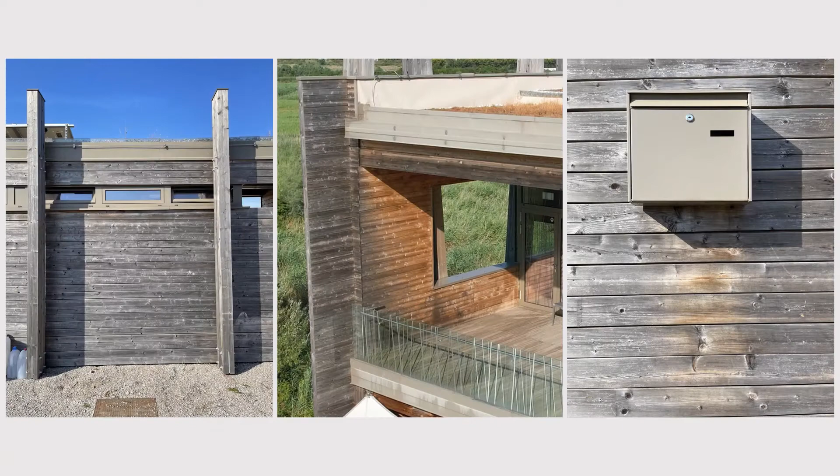This is usually accomplished by applying surface finishes that can function as a protective measure, aesthetical measure, or both. There is also the option of leaving the wood untreated to achieve a gray or silver effect. But in this case, the user should be aware that not only will the wood weather and dry faster, but it will do so more unevenly.

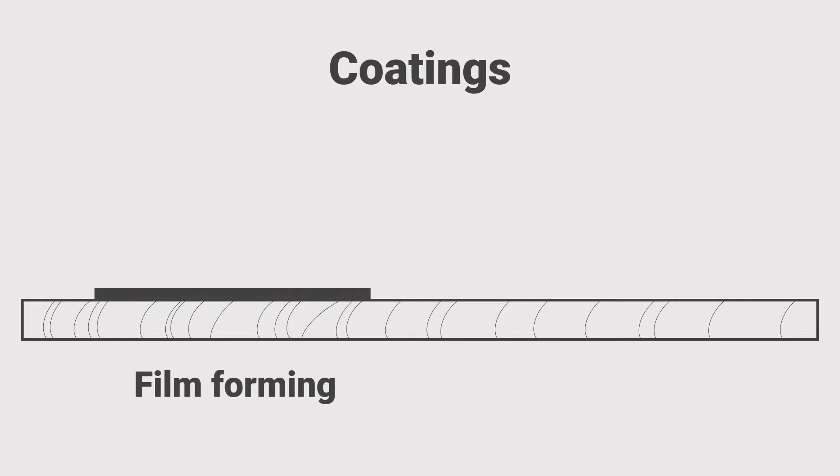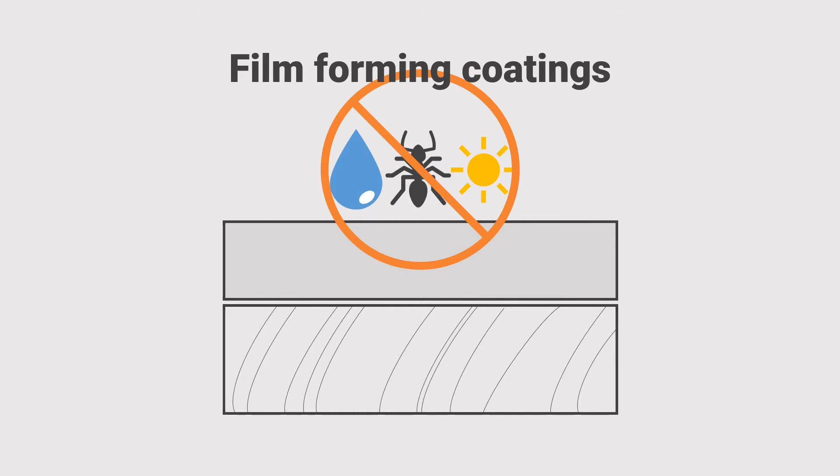Broadly speaking, there are two types of coatings: film-forming coatings and paints, and penetrating oils and stains. As the name suggests, film-forming coatings create a durable film on the wood surface that acts as a physical barrier to the elements and insects. These include clear and semi-transparent coatings like varnishes, and opaque coatings like paint.

Pigmented products offer better protection from ultraviolet radiation since they block sun rays before they reach the wood, making them more resistant to weathering. However, these products cover the wood's desirable aesthetic properties, such as grain and texture. In contrast, clear coatings bring the authentic wooden surface to life, but allow UV rays to penetrate and absorb into the wood.

While film-forming coatings are marketed as long-lasting, they do tend to crack and flake if not maintained regularly. Cracks and flakes in the coating or paint allow water to enter and become trapped between the wood and coating, creating a perfect environment for decay.

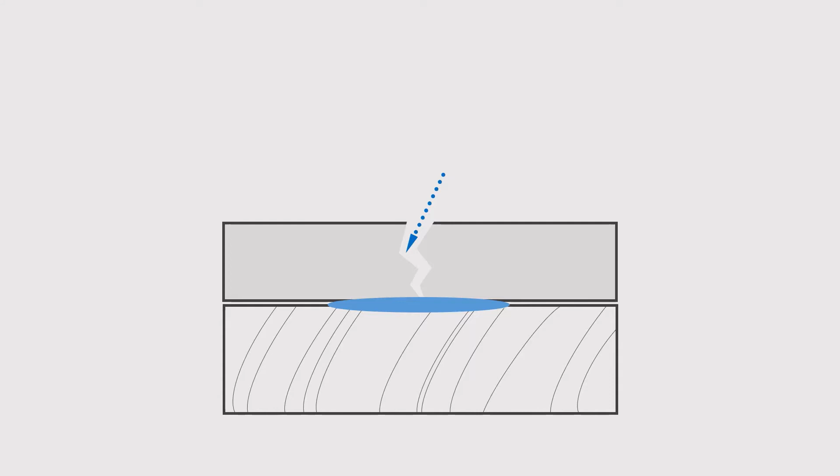Once cracks, peeling, and blisters start to appear, the coating needs to be removed completely from the wood before recoating, creating a lot of work for the owner. For this reason, film-forming coatings are not recommended for highly exposed areas.

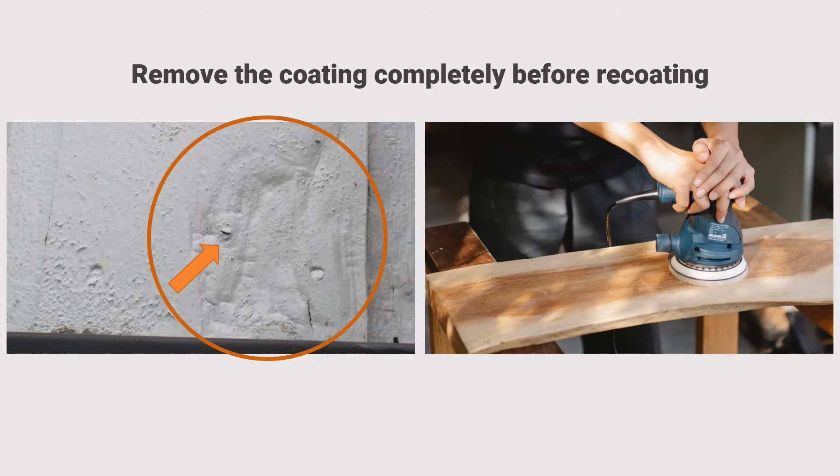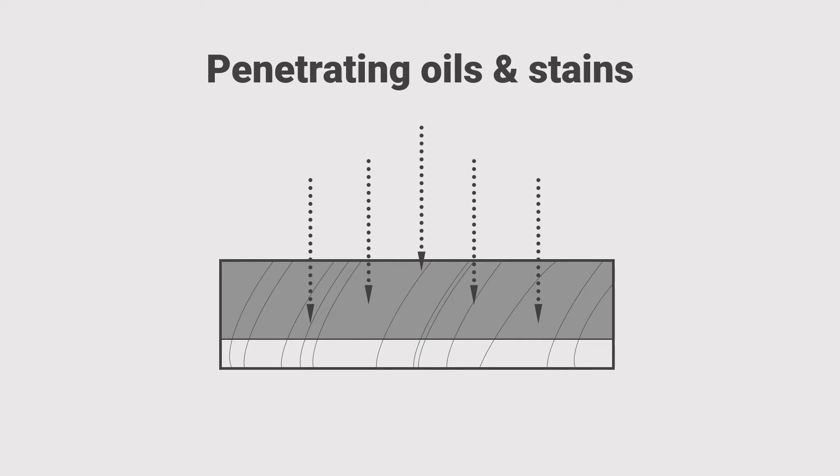Oils and stains, on the other hand, work differently than other coatings. They penetrate the wood and preserve it by soaking into its fibers. Since these allow the wood to move, there are no cracks, peels, or flakes, but oils and stains will wear away through time and become patchy. These types of treated surfaces can be recoated directly without scraping or sanding, typically every 2 to 4 years.

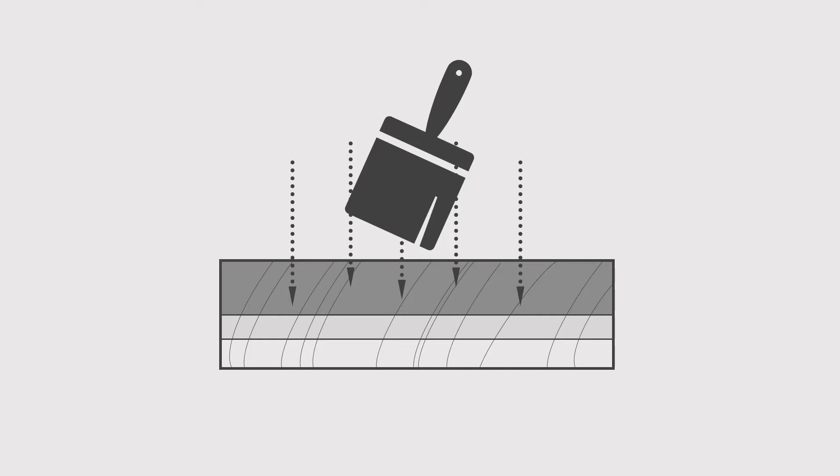So how frequently should exterior wood be maintained? A coating's efficacy strongly depends on type and climate, and different parts of the same building may experience varying amounts of sun, wind, and rain, so there is no one-size-fits-all time frame. In general, recoating should be done when the treatment is beginning to show signs of failure.

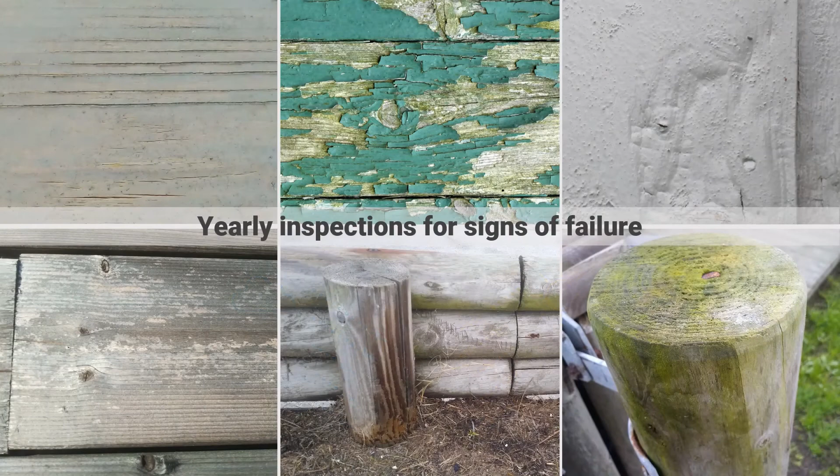Every year, owners should inspect for cracks, flakes, and blisters in the coating, faded colors, the condition of connectors, and possible signs of water, such as moss or algae. Even though mildew is not harmful, it indicates conditions that are favorable for decay.

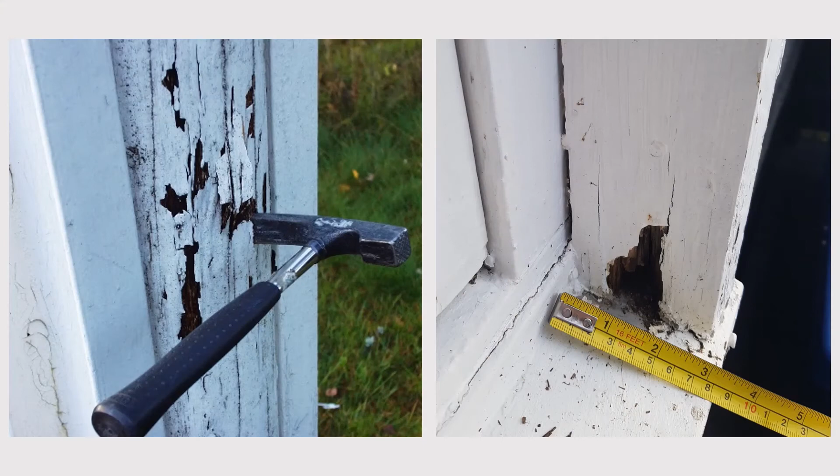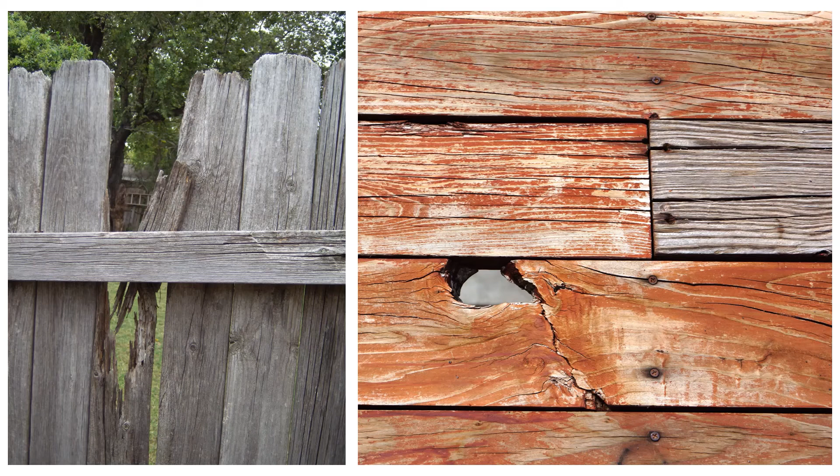Since coatings can sometimes mask decay, one should also probe the wood with a knife or screwdriver to see if the wood can be penetrated easily. If so, fungal decay or even termites may be present. Once the wood is damaged by decay or termites, it is not salvageable and should be replaced as soon as possible to keep the rot or insects from spreading.

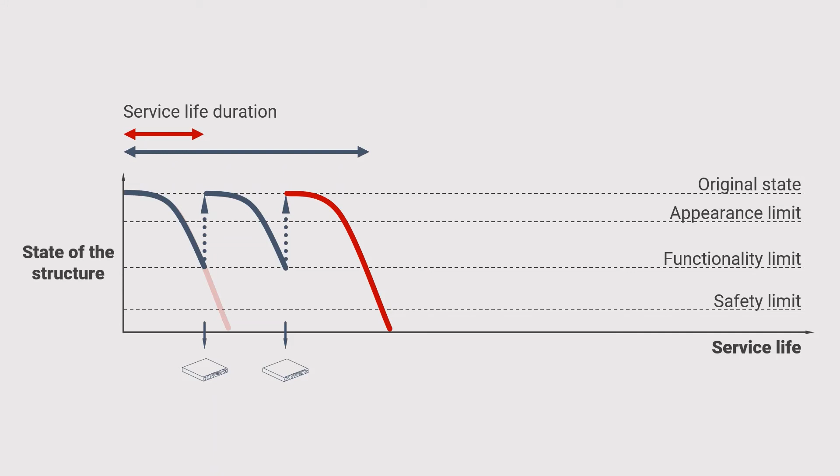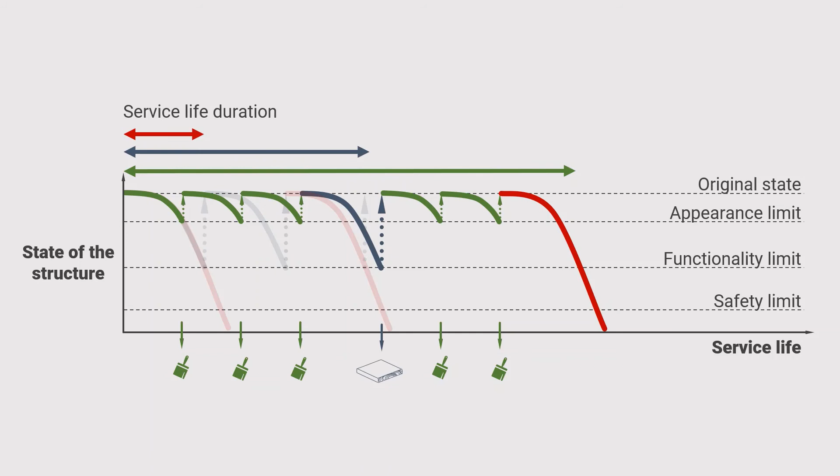Let's see what happens to a wooden structure during its service life with and without proper maintenance. Without any maintenance or replacement, the wood will deteriorate and reach not only the functionality, but also the safety limit much sooner. By fixing and replacing damaged elements that no longer serve their function, we can prolong the structure's service life. But with regular maintenance, we preserve the building's structural integrity and keep it looking good for most of the time, while also storing carbon in the wood material for longer periods of time.

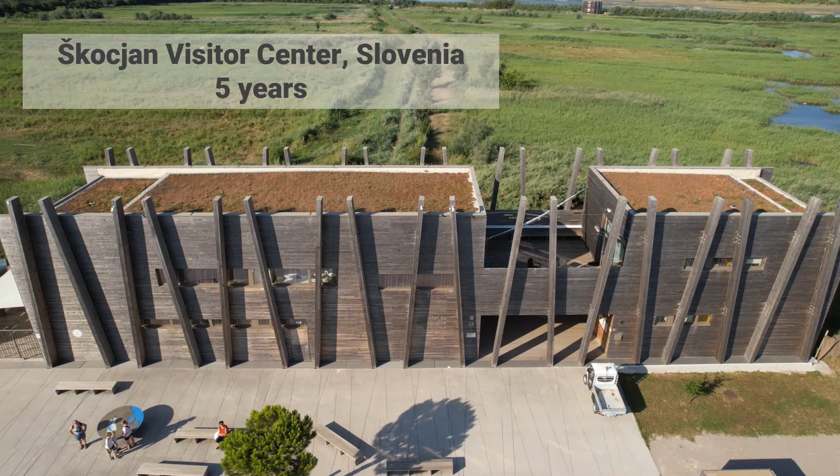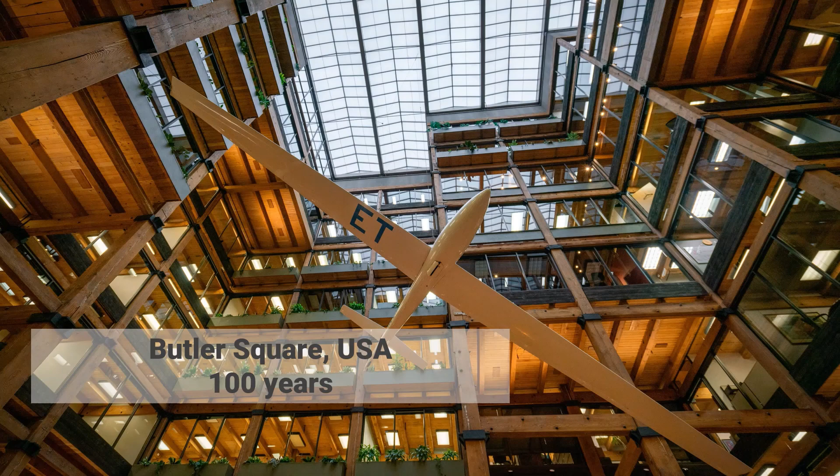To sum up, just like any other building material, wood has its advantages and disadvantages. Knowing how it works, its possibilities and potential pitfalls, investors and professionals alike can plan and predict the performance of timber constructions and design them in a way to last and look beautiful for many years to come.